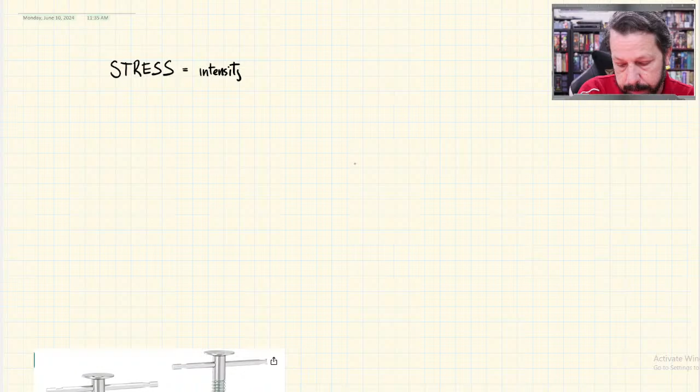Stress in general is the intensity of internal forces. We have all these external forces, like the ones we did in the first lecture and second lecture, acting on this object. We didn't really say what it did to it, but they were forces, and we were balancing forces, finding resultants, or finding components. All of those forces act on these objects, and inside the objects is what we're talking about now. So all these external forces do something - they try to stretch out a beam, or compress a column or something like that - and it's the internal forces that we're interested in.

So the intensity, how intense are those internal forces, is what we call stress. That's our general definition of stress. Our general equation for stress is that internal force divided by some cross-sectional area. That's the general definition. We're going to make some specific definitions for different types of stresses in a minute, but that's the general thing. A lot of times we'll just simplify this as F being the internal force, sometimes it'll be P over A - force over area. That's what stress is: there's some kind of force distributed over some kind of area, and when we find that ratio, that is the stress.

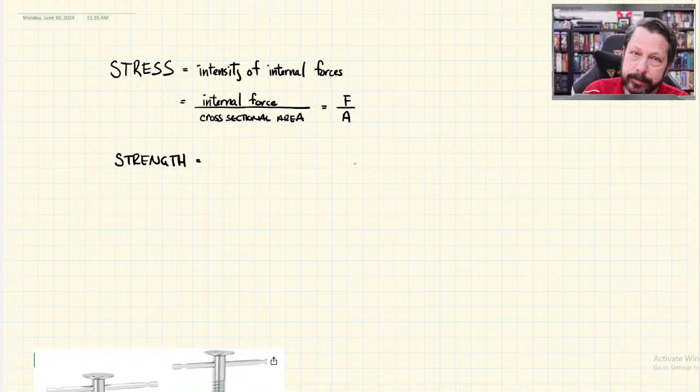And then we've got another term that I'm going to say is strength. This is how much stress an object, a material, can take. Different objects are made of different materials, and it's the material itself that determines how strong it is. So strength is how much stress a given material can endure - endure may not be the best word, but it's good enough. So this strength is a material property.

And it's a thing that we can find, so we can do some experiments. This is a lecture lab, so obviously when we're online, the lab part has to change a little bit. We're going to do some simulations later in the quarter to count as labs, and they'll simulate how you would go and actually do some of this testing and figure out a material property.

Now, normally you don't have to go test every material you're going to use - there are charts. In our case, let's see, we've got some charts. Where did I put them? I think I put them in here. Yeah, so if we go to the General tab in Canvas, there are these reference materials and material properties - there's a material properties PDF. We can look at that and get an idea of some material properties.

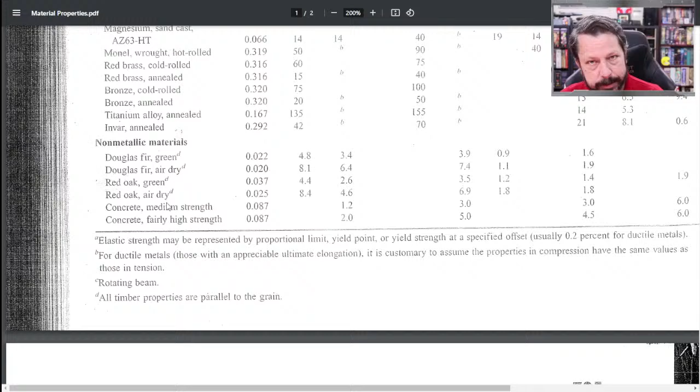So let's just look at one of them here, zoom in on it a little bit. So here's some materials - we've got ferrous metals, non-ferrous alloys, non-metallic materials. Those are a little bit different, but we do have some properties there. And then we've got a table with all sorts of numbers and letters in it, and these columns up here are different things - elastic strength, ultimate strength, specific weight, and all that sort of thing. This is the type of table where we can go find these material properties. You even see some that are labeled strength - now there's two of them, so we'll have to talk about why there's two.

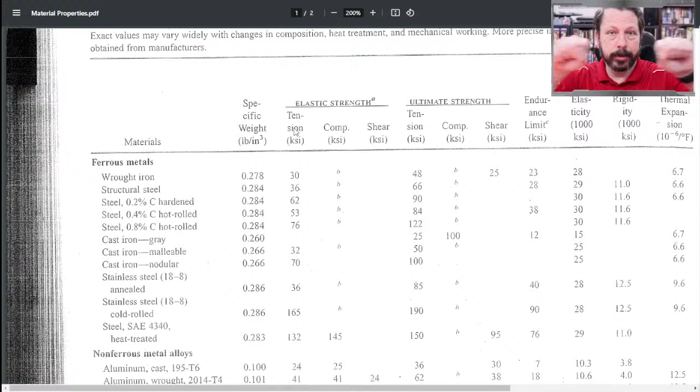But there's a strength and there's a number, 30 KSI tension. We mentioned that when we were pulling on something, we're putting it in tension. And maybe we've got this generic structural steel here, 36 KSI is its strength. So now at least we have a number that we can try to figure out what that means.

One of the things we need to do is be able to find a material strength, calculate a stress in that material, and then see if it's going to be okay or not. Materials can fail in different ways. They could just straight up break, or they could just kind of flex a little bit, stretch a little bit. So we have all these different properties.

I did just see a question in the chat about the quiz. What can we do to prepare for the quizzes? If you notice, we'll take it a little aside and talk about that.

Let's see, where would that be? If we go here, notice that there are some quizzes. Let's see, where's one coming up? There's one, quiz one. There are 5 of these. So these quizzes, doing the homework is preparing for them. These are really small quizzes. You do them on your own. They're not like exams where we sit and proctor them or anything. It's just a little test basically of where you're at, and they're meant to be on the simpler side.

So you do quiz 1, or any of the quizzes, and you have about an hour. It shouldn't take that long, but the whole point of those quizzes is that if you're struggling with that content, then you're probably not quite ready for the full-blown exam content. So I would not actually prepare at all for them. I would do the homework, watch the videos, consider that you're preparing, and then take the quiz and see where you're at. They're 1 or 2 points each, so they're not very heavy on your grade. But do them.

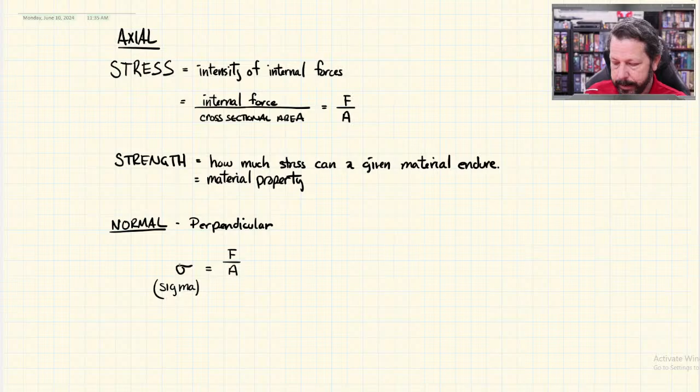So let's take a really straightforward example to start with, and let's just put a rectangular piece of metal, like a bar, under a tensile load and calculate the stress on that thing. This is about as simple as you can do. I'm going to try to draw these in 3D so you're not just looking at rectangles, but have some sense of their actual objects. But here's what I'm going to draw.

So there's our little rectangular bar. I'll try to keep things color coded so that the black lines are the object, red lines are usually forces, and green lines are coordinate systems and dimensions and stuff like that.

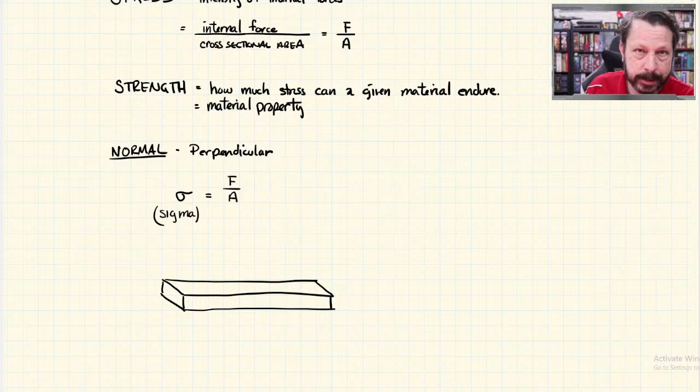Let's make that a little bigger, thicker. There we go. There and there. Those are our forces.

So this is an axial force. This thing has a longitudinal axis, and it kind of lines up right with that line, doesn't it? We have to dip down a little bit, but there's a longitudinal axis here, and this force is on that axis, kind of stretching out this bar that we've made.

So this is a tensile force, because it puts the object in tension, meaning it's stretching it out. You can also tell tensile forces because they point away from the object. If they point towards the object, they're compressive; away from it, they're tensile.

Let's give it a value. Let's use a relatively large force, 500 pounds. Now I'm going to have to put 500 pounds on both ends here.

If you go back to some of the stuff from lecture 1 or 2, remember the idea that forces had to balance, they had to be in equilibrium, static equilibrium. If I don't put this 500 pounds on the right-hand side, this is not in equilibrium. I've got 500 pounds going to the left on this little bar trying to pull it to the left, and let's say it's 0 pounds trying to pull it to the right. It's going to move to the left, and now we're not in statics anymore.

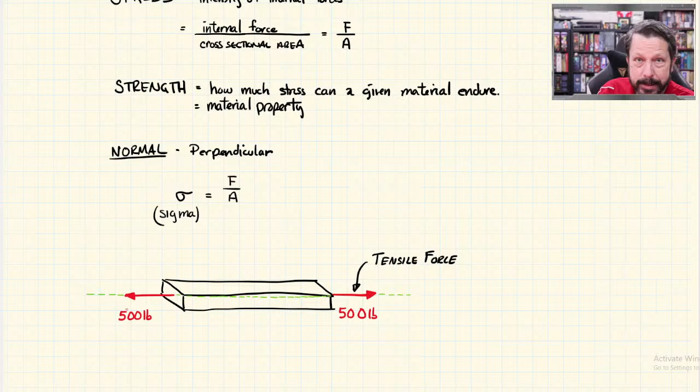Now, one thing that confuses people here is that they think, oh, I've got 500 pulling one way, 500 pulling the other way, the inside of this must be under 1,000 pounds. Because remember, we want internal forces for our stress equations.

This is going to be overly simple to do it in this case, but it does help you later on. If you can do it when it's simple, then you can gradually build up to more complex stuff. Let me see if I can make that a little bit bigger.

There we go. I'm going to cut through the middle of this bar because I want to see the inside, right? I want to see the internal force, so I want to see what's inside it. So I'm going to cut it open.

I'm going to pick one side or the other—it doesn't matter. Actually, let's just do both of them. I'm going to draw the left-hand side, and I'm going to draw the right-hand side, but cut open. So here's the left-hand side, something like this, and then the right-hand side, it's kind of got a matching jaggedy area.

Now I am drawing these kind of jaggedy, but we are making some assumptions that everything breaks perfectly smoothly, and all that. That's not real, that's not the real world, but this is our first introduction to this stuff, so we're not going to try and figure out exactly how things look when they break, how jagged or what angle they break at. We're just going to assume they broke perfectly straight, even though I draw it kind of jagged.

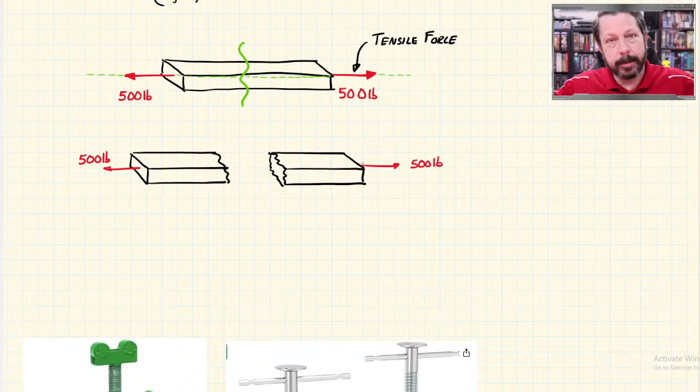Now, once they're broken, they fly apart, but right up until the point that they're broken is what I'm interested in. This 500 pounds might break it, it might not, I don't know. But when we look at this, I need to move them further apart. Let's move this guy over there.

So inside the left-hand piece, there was some kind of reaction force inside there, and up until the point of it coming apart, that reaction was 500 pounds, so that piece was in equilibrium. And the same thing over here.

So the internal force, no matter which side I look at, the left-hand side or the right-hand side, the internal force is only 500 pounds. It's not 1,000 pounds. That's a part that confuses people. It's really simple to get once you get it, but your intuition tells you it's 1,000 pounds because you're pulling two different directions with 500 pounds.

But you're not really doing that. One of these is the force you're applying, and the other one is the reaction to that. So it doesn't matter which one—we'll just say that's the applied force, and this is the reaction to that applied force. So it's really the same force. It's just that there's something somewhere holding this bar steady.

There's a bolt or a weld or glue, I don't know, but there's something on the other end that's holding this bar in place, and then I'm pulling on it with 500 pounds. It's not that I'm pulling in both directions with 500 pounds, although that's what it would look like if I drew our diagram here.

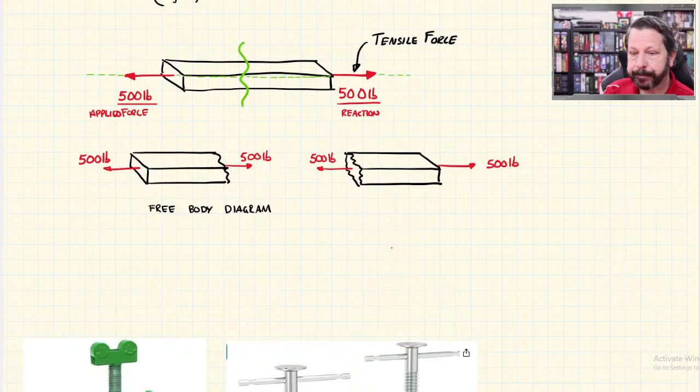So that is actually an important word there. What I'm doing here is I'm drawing free body diagrams. So free body, meaning that the body of interest is floating out in space, free from everything else, and that I have applied all of the forces that are acting on this body.

Now, here I've got two little bodies that are just a piece of the whole bar. But that's okay. You can have free body diagrams that are a single item, like this pin, or you could have free body diagrams that are just a piece of this pin. You take it apart and it's just the piece of it. Or you could have free body diagrams of a really complex assembly.

So there are a lot of different ways to do free body diagrams, but they are going to be the most important part for statics and strength of materials. So just like a circuit diagram for circuits or a control volume for thermo, every kind of discipline of engineering has its own diagram or picture with its own rules for creating that thing that helps you solve those problems. So for statics and strength of materials, it's the free body diagram.

So you've got to get in practice drawing free body diagrams. And the easiest, even though this is kind of silly to draw because it's just this little rectangle, it's good practice to start learning how to correctly assemble your free body diagrams, so that you can actually solve the problem correctly.

So I would look at this, and I would not necessarily need to draw this as a free body diagram because it's so simple, but it is good practice to start with the simple stuff. If you can't do the simple ones, you need practice on them before you can do the more complicated ones. So I'm trying to do this stress.

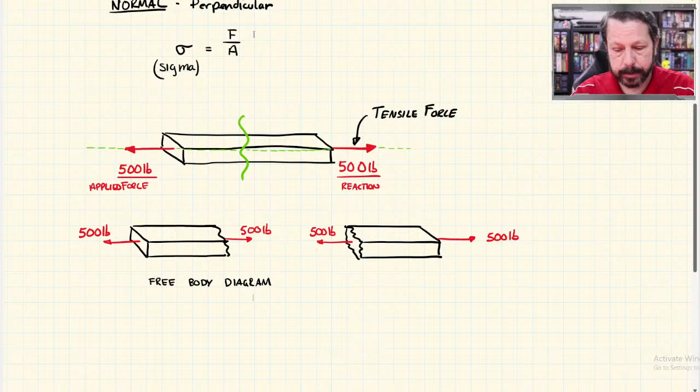So I want to do a normal stress. The perpendicular here is talking about the fact that the force is perpendicular, so there's my little perpendicular symbol, to the area. So the force here is perpendicular to the area here.

So if I look at my diagrams here, the internal force, let's just do the right hand side. So there's the internal force. The area that it's perpendicular to is this little area, that's the area that it's acting on, and it's perpendicular to that area. And since the force and the area I'm looking at are perpendicular, this tells me it's a normal force. So then I can use normal stresses and normal strengths and that sort of thing.

In order to calculate this, I need some dimensions. I don't have a great place to put them, but let's put them here. Let's just say that distance was, since I did pounds, let's do some kind of inches here. Let's make that a quarter of an inch. And then let's do this distance, which is really going to get convoluted in there. Let's say that one is a half inch.

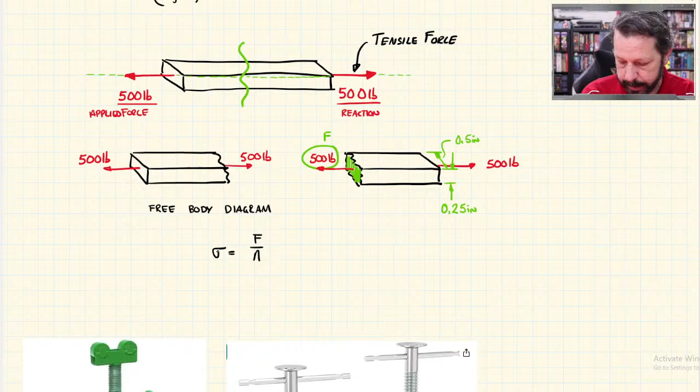Okay, and even though I drew the bar a little bit wavy, we'll assume that it's perfectly straight, and everything's the same dimensions. So if I want to do this calculation for sigma equals F over A, the internal force is 500 pounds.

And I'm looking at that internal force. And the cross-sectional area is whatever the area of that little green hatched piece is, which is a rectangle, 0.5 inches times 0.25 inches. So I had a calculator somewhere.

Here it is. No, that's not it. I don't know where I put it. I may not have brought it in here. Okay, we'll have to get the old phone calculator, I guess. Let's see, here we go.

So 500 pounds divided by 0.5 times 0.25.

4,000. And the units on that are pounds in the numerator and inches squared in the denominator, so pounds per inch squared. A lot of times we won't say pounds per inch squared, we will say 4,000 psi. You've probably heard psi in terms of air pressure in a basketball or something like that, but it's also the same units for stress.

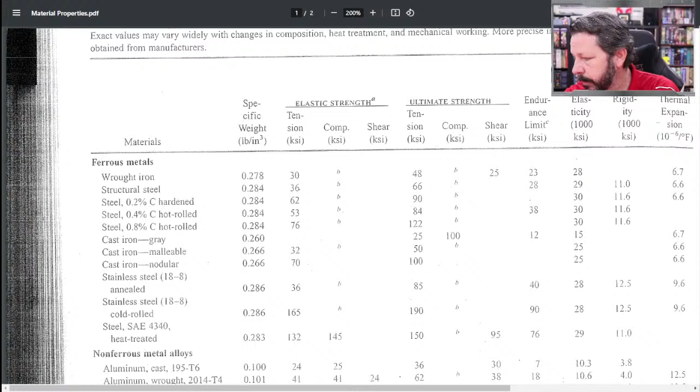All right, so that was pretty simple. So we ended up with 4,000 PSI. What we could do then is go look at our web page, material properties, maybe our structural steel. Let's look at ultimate, that's probably easier to understand right now. Ultimate strength, the point at which this thing would break, is 66, and the units there are KSI. So it would take 66,000 pounds per square inch to break a piece of structural steel. If this little bar is structural steel, even at this pretty small dimension, 1/2 an inch by 1/4 inch, we're nowhere near breaking it.

In fact, let's move these guys down again because they're getting in the way. We could say that we have a factor of safety against ultimate failure, which would be like fracture. So FS, that's going to be factor of safety, is going to equal your strength divided by your stress. So how much can you take divided by how much do you have?

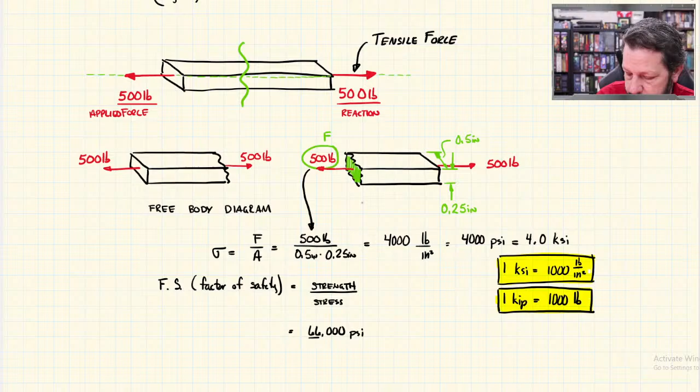So our strength, if we were doing the structural steel, ultimate strength was 66,000 psi, and we only have 4,000 psi. So what's that number? 66,000 divided by 4,000 is 16.5. So what we would say in this situation is that we have a factor of safety against fracture, because this number was the ultimate strength. Some people would call that the fracture strength, your book calls it ultimate strength though. So we have a factor of safety of 16.5 against fracture.

And that's a really high factor of safety. Normally the factors of safety we're trying to operate with might be like 2 or 2.5 or something like that, or maybe 1.5 in some cases. So 16.5 is a very high factor of safety.

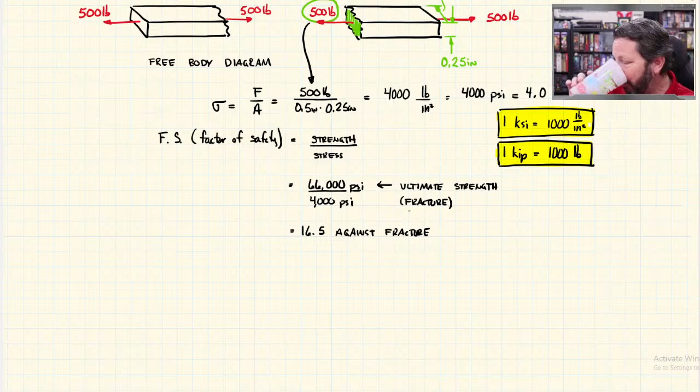But this is our example, super simple example for normal stress. Some people would just call it axial stress, although I'm using axial stress as a bigger category, and normal stress is a particular type of axial stress.

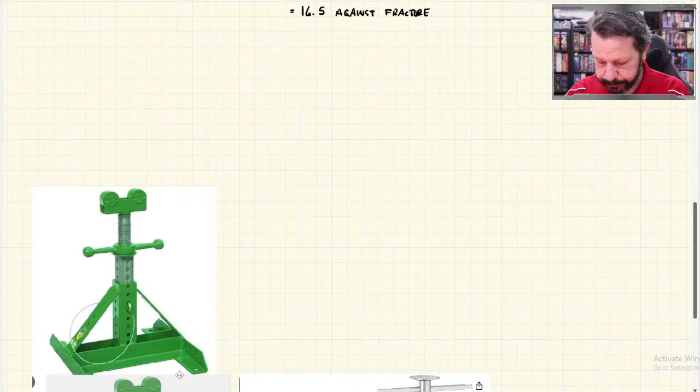Let's move on to our second type of stress under the axial stress category. Let's move these down some more because we need some new space. I'm going to call this one shear stress. So it's still an axial stress, but it's not perpendicular, it's not normal stress. The force and the area the force is acting on are not perpendicular to one another. And it's shear, S-H-E-A-R, not E-E-R.

So there's actually an example of it in this picture. Maybe I should get it back, make it a little bigger. In this picture, you've got this little safety pin right here. It actually might be a U-shaped pin, and now that I look at it, I'm not really sure. But this is a jack stand of some sort. You lift up the car, put this thing in place, and it's got some adjustment in it. You can turn this to have a fine adjustment, but you also have these holes where you can raise it up, looks like an inch increment at a time.

In order to keep it from just falling down, they've got this pin that goes through this green part, through the gray part, and out the back side, and it is in shear.

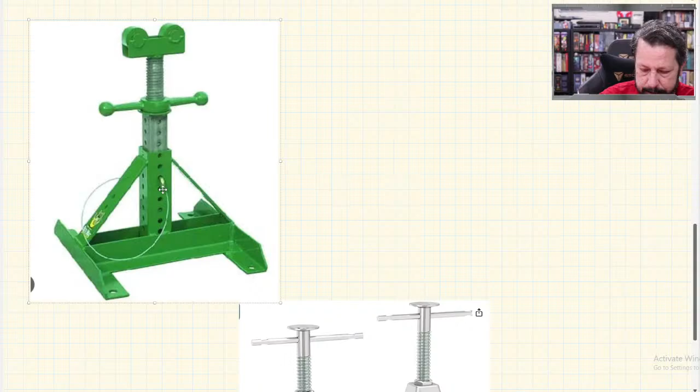So let's assume it looks like this is a U shape, like there might be two pins that go through here, through these holes. But let's draw kind of what that might look like, and then we'll use that to talk about shear stress.

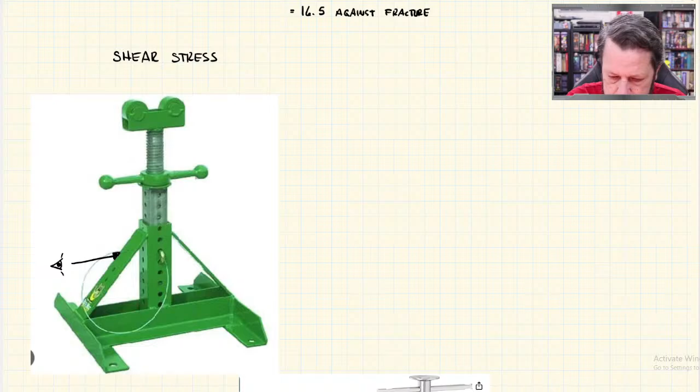So I'm not going to draw it in this view. I'm going to draw it looking from this direction, as if my eye is over here, kind of looking at it from that side. So that would look something like this.

There's the outside of the green part, and the green is pretty thick metal, so we'll draw the thickness of it kind of like this. And I even have a green, so we'll make that kind of green in there. I'm kind of just drawing that little section right there.

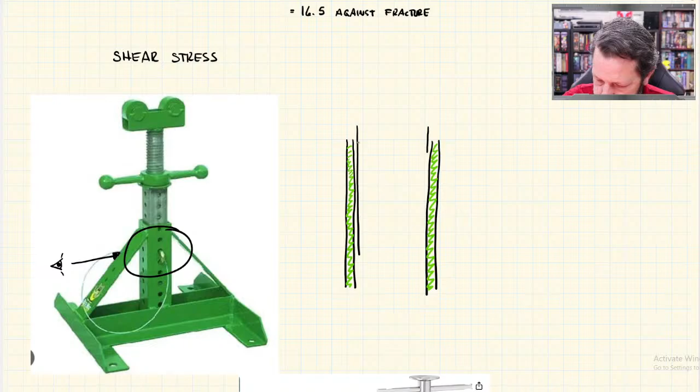Now inside the green square tube is a gray square tube. So we're going to draw that one kind of like this. We don't really know how far down it goes, so I'm going to end it right there, so that'll be its bottom. These are just kind of, I don't know how far they go.

It, I think, is also a tube, so we will give it a little wall thickness here. Maybe it's thinner than the green, I don't know, might be the exact same material. And I don't really have a gray, do I? Let's see if I can. Yeah, there's a gray. All right, so there's the gray tube.

And then this pin, this U-shaped pin, goes through all of this stuff. So the pin goes through here, all of this, and then it's a U shape, so it does something like this, and it goes through all of this.

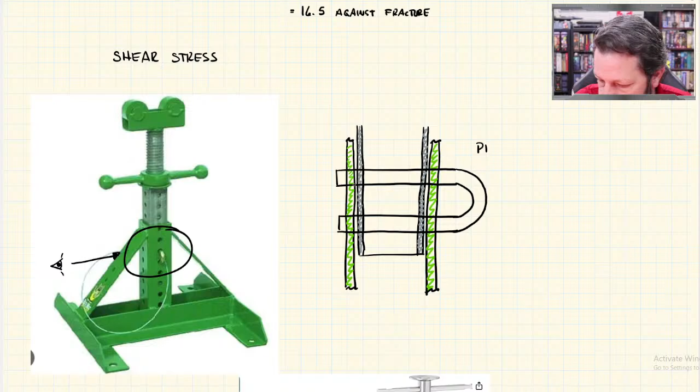So that pin is in what we would call shear. So this pin is in shear. In fact, you might even call this a shear pin sometimes.

And what that means is that obviously, if I've got a car sitting on this thing, there's a pretty big force up here, right? So there's a force that's being applied, ends up being applied to this gray tube. And then there's the reaction force over here because the green thing is attached to a bunch of stuff that's sitting on the ground. So I did put 4 arrows here, kind of split it apart.

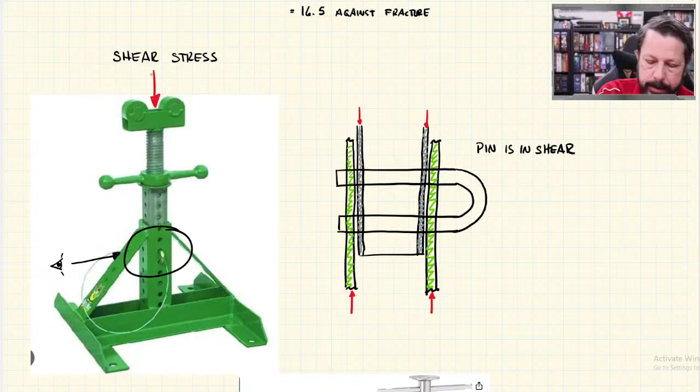But let's just say that our car, that this corner of the car that it's lifting up or holding is 800 pounds. That's kind of realistic for a smallish car, if one quarter of it is on this thing. So let's just put 800 pounds total, which would put 400 pounds here.

And I'm going to assume that it gets evenly distributed. So this is a sophomore 200 level class, and so we're going to generally assume things are evenly balanced and symmetric and all that kind of stuff, at least for now. Now someday in the future, another class, another course, you might have reason to think that this 800 pounds does not get evenly spread across the two sides of the gray tube. I think it would, even in most more advanced ways of looking at this.

Those 4, or that 800 total, those two 400 pounds need to be reacted, and I'm just going to put all of the reaction here. Right? So now I've got a thing that's in equilibrium, but the gray and the green aren't actually connected together.

So all of this force ends up, I'm going to use a red arrow, it ends up on this little surface, that little surface, that little surface, and that little surface. So if you look at those surfaces, they are not perpendicular to the forces that are causing stress there. In fact, they're parallel to them. And so that's what we mean when we say they're in shear.

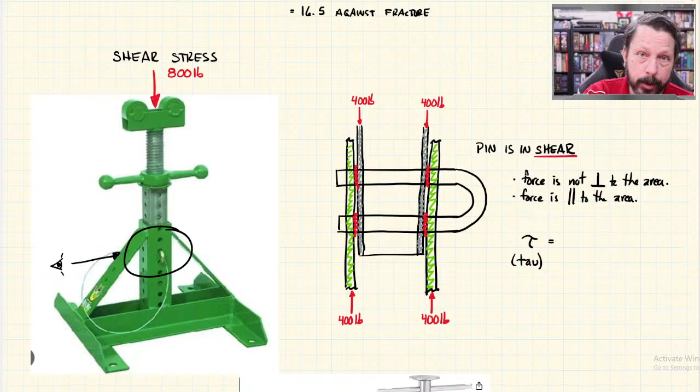Parallel to the area. So to distinguish when we're talking about shear versus normal stress, we use a different symbol. We're going to use tau, that's my Greek letter tau, equals internal shear force, V, over the area that shear force is acting on. So same idea, force over area, but two big differences: the force is parallel to the area, not perpendicular to it.

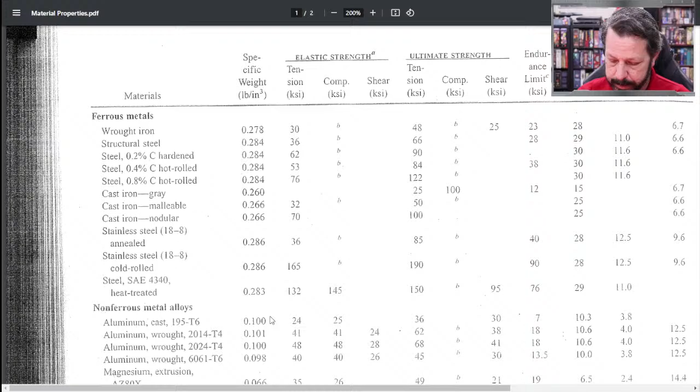Let's see, I thought sometimes there's a note down at the bottom of these charts. This one doesn't really have one though, about what to do. But you have to choose, because there are multiple models you could use for calculating the shear strength. We're using the most conservative, simplest one.

All right, so back over here. Where's there? There we are. If we wanted to calculate the shear stress in these pins - well, this pin would actually need to fail 4 different times, right? All 4 of these little red squiggles that I drew would have to break in order for the jack to fail. So this would actually be an example of quad shear.

So you can have single shear, double shear, here I've got quad, you can have any number. But in this particular case, we would need 4 different cross sections of the same U-shaped pin to fail for the jack stand to come crashing down - and this is a jack stand, we're probably working under this car, so we want it to not be likely that this thing's going to fail. So we've made it have to fail 4 different times, at least for the pin to fail.

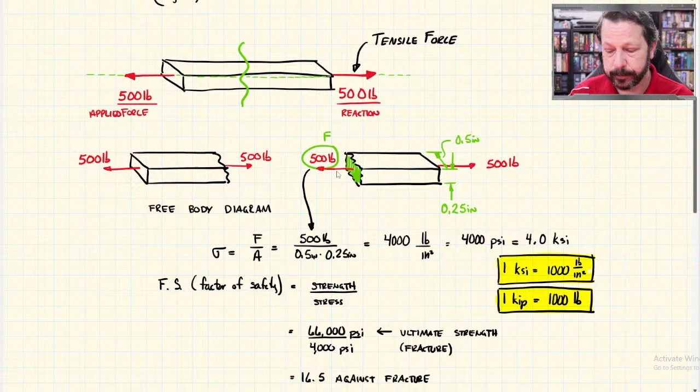There are other ways the jack stand could fail. There are even some ways like this where instead of a tensile force, it's a compressive force. Other parts of this do have normal forces, and it's possible they would fail. But this particular one is a shear stress.

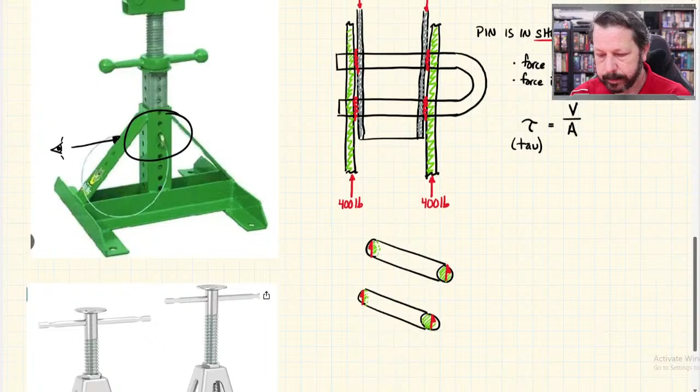Now figuring out, well, how much is this really going to be? The total external load, looking over here at the jack stand, the whole jack stand on the left, the total load is 800 pounds. That total load gets spread out over these 4, so each one of these is 200 pounds.

Now again, does it get spread completely, perfectly, evenly? It actually gets close, assuming that these are all the same size, because as you apply loads to objects, they deform a little bit, and they kind of all even out. So assuming that it's more or less even to begin with, then it's going to be close to each one of these 4 little green circles having about 200 pounds on it. There might be one that's a little bit smaller with a smaller area and higher stress there, but for this course, we're assuming things are perfect.

So that's kind of how I would draw this. I would also need to know what size are these. So I don't know, looking at the picture, maybe that's 3/8, maybe that diameter.

I'm going to use inches since I used pounds on the other thing. We will use both metric and US units in this course. A lot of times I end up defaulting to US units, but metric units are just as valid and useful, and so we will use both.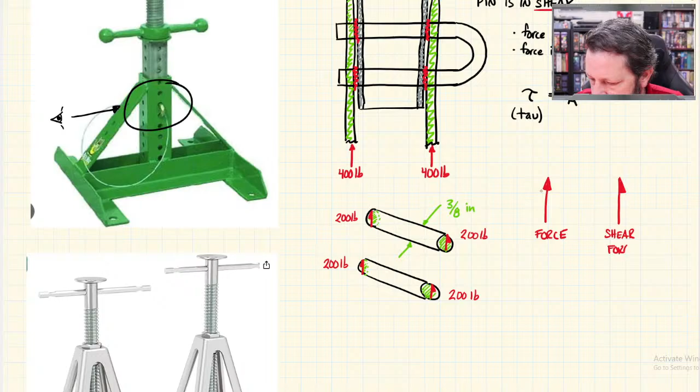Let's see, one other thing about these. Notice this is just a technical thing, but for forces, the regular forces we've been using, we've used an arrow kind of like that. But for shear force, we show it differently, and the arrow is only one-sided. So that's another way that we're reinforcing the fact that these particular things are shear forces generating shear stresses, and so you even draw the arrows with only half their arrowhead to show a shear force.

Also, super in the weeds here, but I'll go ahead and tell you, this arrowhead size is 3, and I guess this one doesn't have the other side on it, but to 1. So that's really not very important, but if you're drawing these by hand and you want it to look consistent and typical, then the arrowhead is a 3-to-1 ratio. I'm not going to grade you if your arrowheads aren't 3-to-1 ratio.

So to calculate our shear stress, tau equals V over A. It doesn't matter how we approach this. We can either say that, well, our total force is 800 pounds, we have 4 200-pound shear forces, and our area is 4 areas that are pi times diameter 3/8 of an inch, pi d squared over 4.

Let's see, I've got to get my parentheses sorted out right. So you can either do that, or you can just say that, well, they're all equal, so one of them is 200 pounds over a single area that is pi d squared over 4.

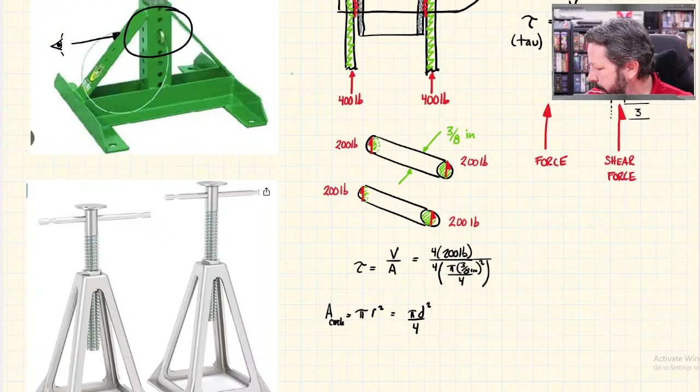Also, another aside, you probably often do area of a circle as pi r squared, which is completely fine. I did pi d squared over 4, which is equivalent. Seems more complicated, except that if you go to actually talk about things that are round, like a bolt or a pin, or if you go to measure something that's round, you get your calipers out and you measure it, you're measuring and talking about the diameter, not the radius. So it usually makes more sense and it's more familiar if you use pi d squared over 4, because that's probably the measurement you have. It's totally fine to say the radius is just half of d and deal with it that way, but you're probably going to be given diameters, and that's what we were given here, 3/8 inch diameter.

Now my phone calculator is probably not going to like this very well, but let's see if we can calculate this. All right, so our numerator is 800 pounds. Our denominator is 3/8 of an inch squared, which I don't even know where squared is on here, so let's just multiply by 3/8 again.

Whoops, 3 divided by 8. So pi d squared times pi, which we're just going to use 3.14159 because I don't know where pi is on this. Divided by 4 times 4, so we don't need that, that's going to end up being the same thing. And I think, let's see, did I get everything squared times pi? All right, so I think our denominator is 0.4418 inches squared. So we do end up with PSI.

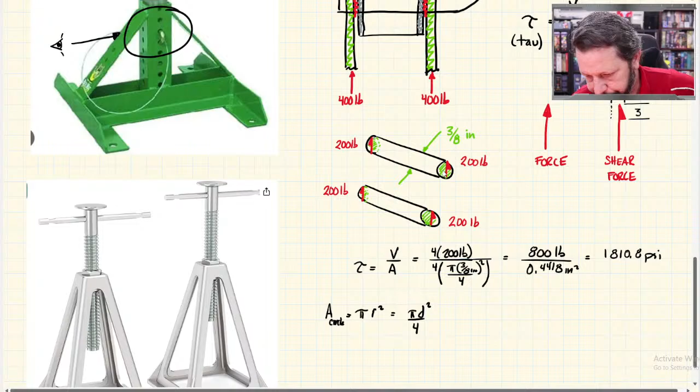The question was, why did I draw all these arrows pointing up? It's because I took a shortcut and didn't draw everything. So let's take all of this, copy it, and put it down here.

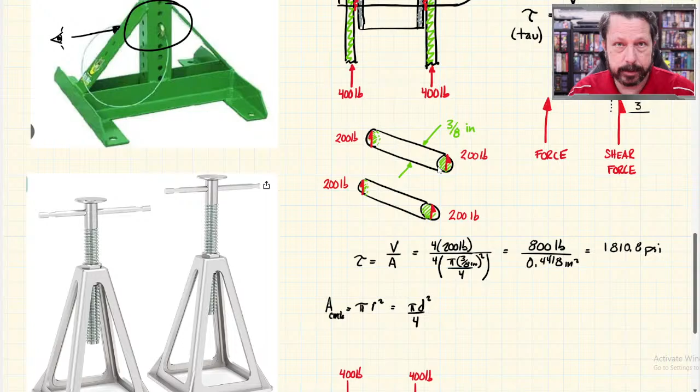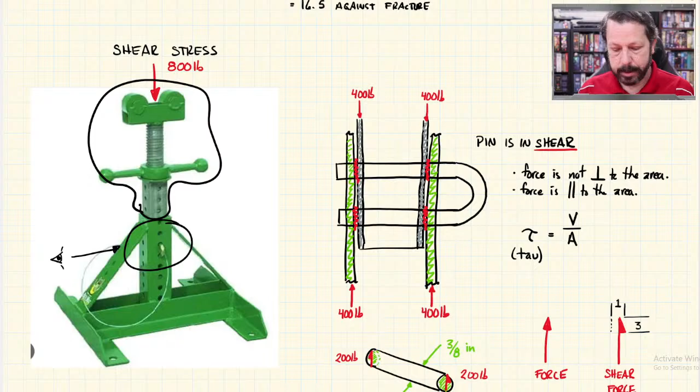Let's say one way this thing could break is like this - the way we're interested in is that the U-shaped pin shears and the thing falls down on us. What that would mean is all of this is gone - the gray inner section shears off the pins inside the jack stand, and this thing comes crashing down on us, down inside that green tube.

So what that would do is, this is the failure mode. The gray tube has sheared all of these green circles, and the pin - there's pieces of the pin over here laying on the floor somewhere, and other pieces over here laying on the floor too, or maybe stuck in the green tube, but they're not holding up the jack stand anymore. So this free body diagram would represent that situation.

So we're asking what-if questions: what if the U-shaped pin failed on us in shear? This is what it would look like. That free body diagram would have the 800 pounds pushing down, and these shear forces are all the reactions to that. If I don't have these 200-pound reactions on each of those sections, then it's failed - it's broken, and the jack stand has come crashing down on us.

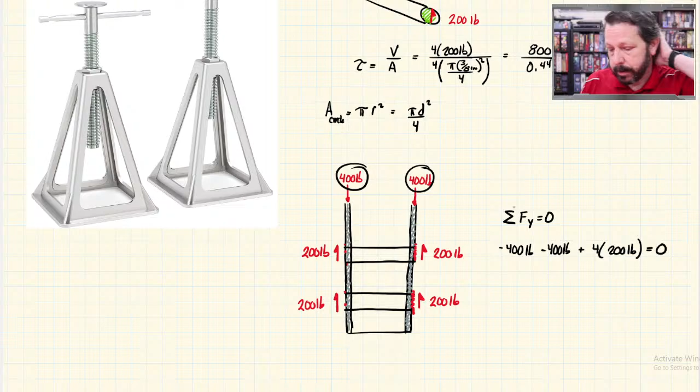Remember from equilibrium, summation of forces in the y direction equals 0, assuming y is positive going up. I've got a total of minus 800, because those two point down, plus all of these four 200-pound forces. If that does not equal 0, which it doesn't right now, then I'm not in equilibrium and things are moving. That's why I pointed them up - they're reactions to the 800 pounds of the car sitting on top of the jack. That's why I drew them that way.

Now, the good thing about shear is it doesn't matter if you shear one direction or the other, because the material behaves the same. But for axial forces, look at the cast iron gray - it has one number in tension and a completely different number in compression. Some materials don't behave the same in tension and compression, plus the part itself may behave differently. Think about a rope: I pull on it and it's great, but I push on it and it doesn't resist at all. So it matters with non-shear forces whether you got the arrows the right way, but with shear forces, if the arrows are backwards, it behaves the same either way - so it's not as big a deal.

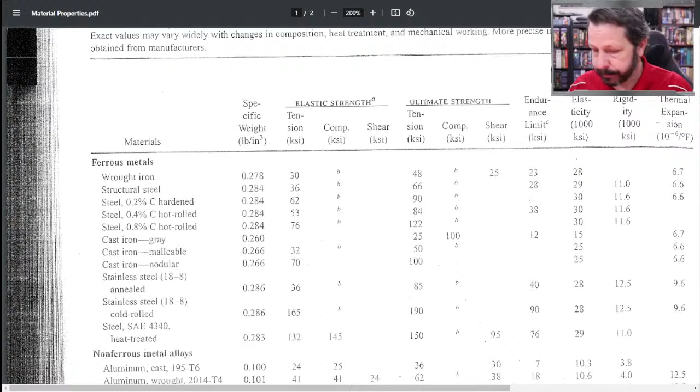All right, so that's that. Let's see our number - I never confirmed if this was right, but 1800 psi, or 1.8 ksi if we wanted to use that. Is that a big deal? These are probably steel pins, so we can use that generic structural steel number: 66 ksi of tensile strength. There's no number listed for shear, so our idea is to take half of the tensile, so 33 ksi. We're at 1.8 ksi - we're nowhere near failing this thing.

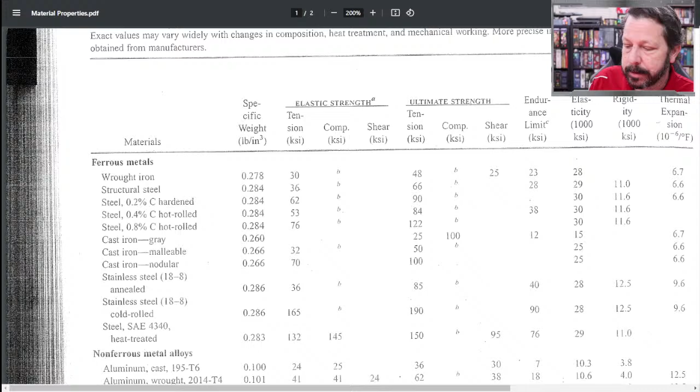So if we wanted to write that out, it would be our factor of safety, and again we're going to do this against fracture, which equals our fracture strength - which your book calls ultimate strength.

If this is structural steel, that number is 33 ksi, or 33,000 psi, divided by our stress. In this case, this is a shear fracture, so our shear stress...

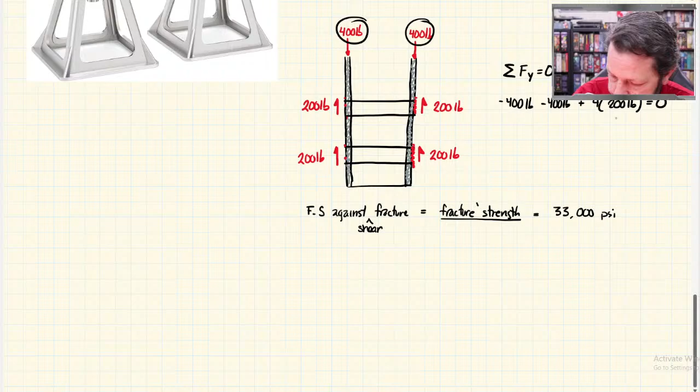That I calculated was only about 1,800 psi, assuming I did that right, which I don't know. It was approximately that, so that gives us a really large factor of safety. If the 1,800 is right, then 33,000 divided by 1,800-something, 1,810 is what it was. But if we did 1,800, it's 18.3, approximately 18.3. So even more factor of safety than the first one we did.

Now that is assuming the 1,800 psi is right. You'll have to do those calculations on your own. It's really just this little equation, which hopefully I did correctly, but on the phone, I don't know. Any other questions on the shear or normal stress?

We have one more type of stress, and actually there's another type of shear, some other words, still a shear stress. Oh wait, somebody said that they got the same number. Good, then they actually used a calculator. So hopefully that 1,810 is right, which gives us a really large factor of safety.

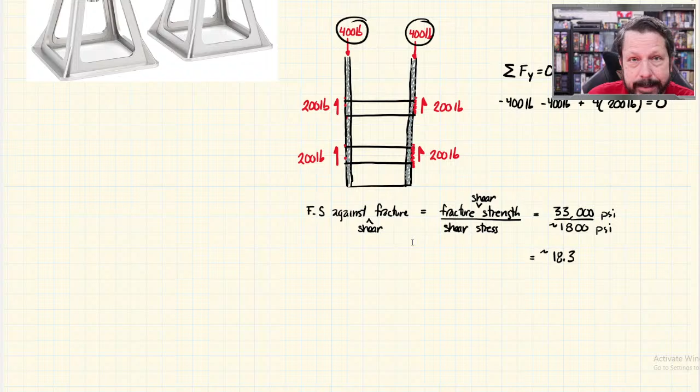Now, I want to point it out again, you do have to make sure you know shear stress from non-shear stress, because the strengths are so different. If we only had a factor of safety of like 1.2, but we actually calculated this as a regular stress and not a shear stress, then it probably would fail, because shear strength is so much less than the tensile and compressive strength.

So be careful, and you can 100% know when you draw your free body diagram if the applied load - in this picture it's easier to see, if the applied load, the 800 pounds up here at the top, or the two 400 pounds - and the reaction loads, so the internal 200 pounds, all these little 200 pounds, if they are not perpendicular to the area you're interested in at that time... here the areas are, we're just seeing the side of them, those four areas - it keeps erasing them, it thinks a squiggle I want it to erase. So if those forces are not perpendicular, then it's a shear force, and you've got to do a shear analysis. The equations all look the same, but the strengths are way different.

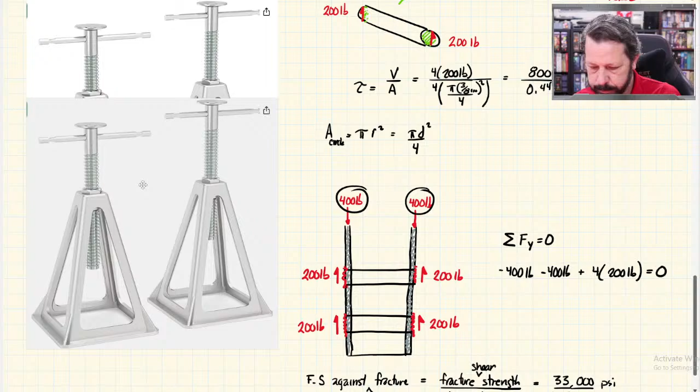All right, let's talk about the third type, and then we'll go back and do some special cases for shear. Actually, the third type we'll use this picture, so let's move it down here. Okay, so another type of jack stand.

So here we have some, you could maybe calculate a shear stress on this pin that's going through the bar here when you try to raise the jack up or down. It acts like a screw. There's some normal stress in these legs over here, and in the screw itself there's a big normal stress there that we could calculate. But this one is a special case, and it's going to be called a bearing stress.

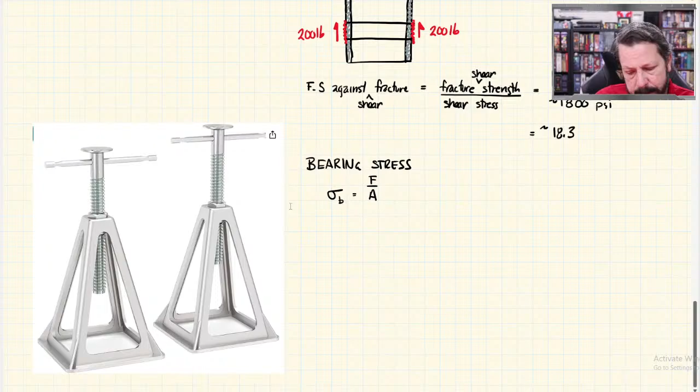And it's going to look pretty much exactly like a normal stress, but it's a special case. So we will use sigma, sigma B a lot of times, to say that it's a bearing stress, and it's going to equal force over area. But here the force and area are actually in contact. So the bearing part is that this area is bearing the load of some sort. I mean that's still true here - this shear stress or shear force is on that area, but here we're talking about they're going to be perpendicular, or we will treat them as perpendicular, and there is a force that is being distributed over some area.

So there's actually two good examples in this jack here. One of them is that the jack stands are sitting out on the ground, and there's this area, something like this, at their base that's sitting on the ground. That area would be the bearing area in this scenario, and it's acting to kind of spread out the load.

You know, if I've got our 800 pounds up here again - if I put that entire load, if I didn't have the legs here, and I only just had the screw part, and it just went in the bottom of the screw sitting on the ground, that's a really small area. It'd be unstable, and it would put that 800 pounds on a pretty small area. So I don't know how big this... oh, let's not do that.

I don't know how big this diameter is here, but let's say it's a 1-inch screw. So sigma bearing equals F over A, and I've got 800 pounds spread out over an area of pi d squared over 4, with d equal to 1 inch. So what is that? Pi times 1 squared is 1, divided by 4, so 800 divided by 0.7854, I get 1,018 psi. That's not large, except you have to think about this jack stand might be sitting on dirt or something like that.

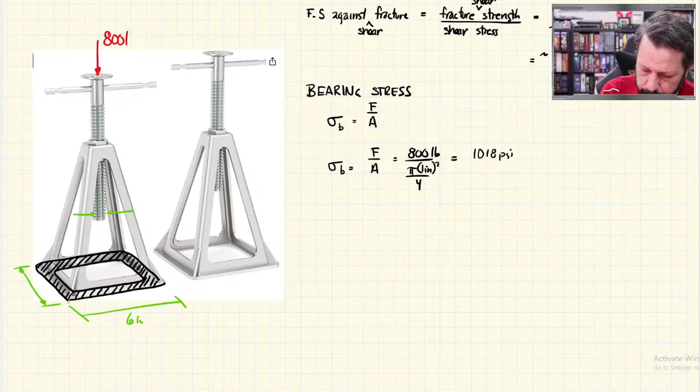But anyway, once I start spreading that out, this bearing stress will be much lower. So let's say our dimensions here, let's say that if that was 1 inch, then that's like 1, 2, 3, 4, 5, maybe this is 6 inches, and this is let's call that 4. No, let's assume it's a square, so it's just in perspective, 6 inches also. And then let's make this internal part, looks like that might be 1 inch, so let's make this 4 inches in here. 4 by 4, even though I drew it like a rectangle, if we looked at it from overhead it would be a square, a hollow square. There's a cutout in the middle.

So the area for that thing would be, sigma bearing equals force over area. Same force, 800 pounds. But now the area, if we did this whole rectangular base, is 36 inches squared minus 16, we have to cut out the hole. So 20 square inches. So we have 800 divided by 20, we have 40 psi.

So this one is if we put all of the force on a little 1 inch circle, just the screw. This one is if we did all of the force on this base here, which is much larger, so the stress goes way down. So you can manipulate your bearing stress by calculating the large area that you have spread out your force over. A lot of times you'll see things like these jack stands, where you're trying to spread out the force over a larger area so that you can reduce that bearing stress.

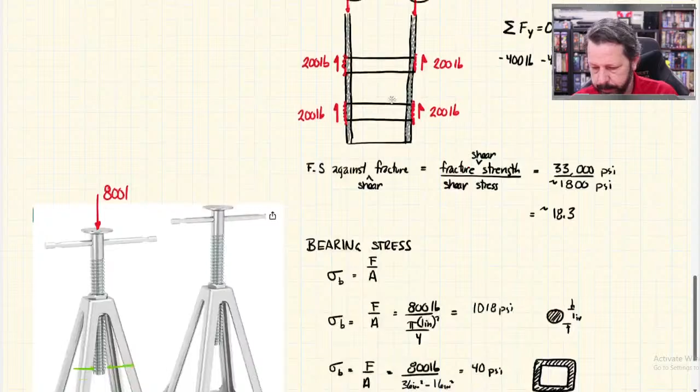But another one you might have to deal with sometimes is related to this problem. It's possible that we have this same load scenario, but the pins are really strong, so they don't shear. In that case, let's take this—I've already erased it—let's just copy it and we'll deal with it down here. Okay, so let's say the pin is strong. I don't know if I'll be able to erase this well, but we'll erase those and then put them back. And we got some gray in there, and the pins go through everything. All right, so we have strong pins now that aren't going to break on us.

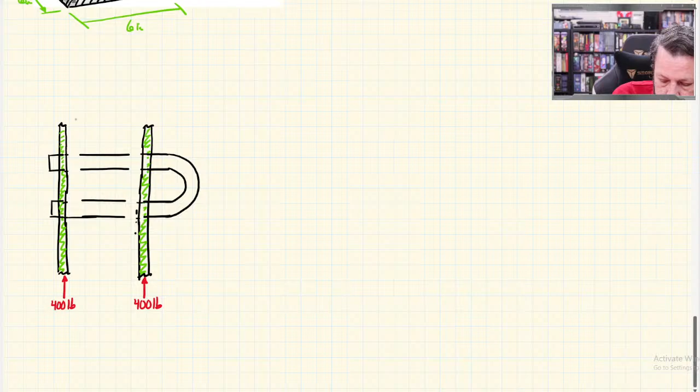It's possible that the pins are bearing on the green tube and on the gray tube, just in a different way. But let's look at the green tube, so let's get rid of the gray tube. Gray tube is gone. You may not always know which piece to look at to determine what's the worst case scenario in real life, so you might have to try a bunch of different things. We might have to see, is the bearing stress between the pin and the green tube worse, or between the green and the gray tube, or is the pin itself going to fail and shear?

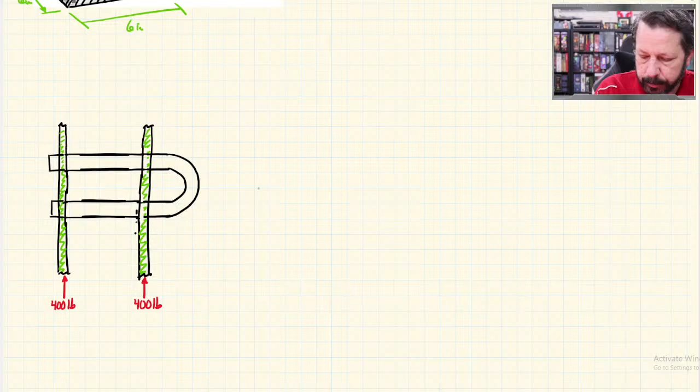You might have to do a lot of what-if scenarios in the real world to figure out your limiting factor. In the course, we'll just tell you, calculate the bearing stress between the green tube and the U-shaped pin, we'll tell you what to do if we want a particular thing. So what I'm interested in here is let's draw a side-ish view of one green tube. The green tube was, just so you remember, this rectangular tube down here that's got the circle around it. So that's what we're looking at. So, it's something like this.

We're going to draw it straight, let's not do it crooked. We're not going to look at the whole thing, we're just looking at some little section of it.

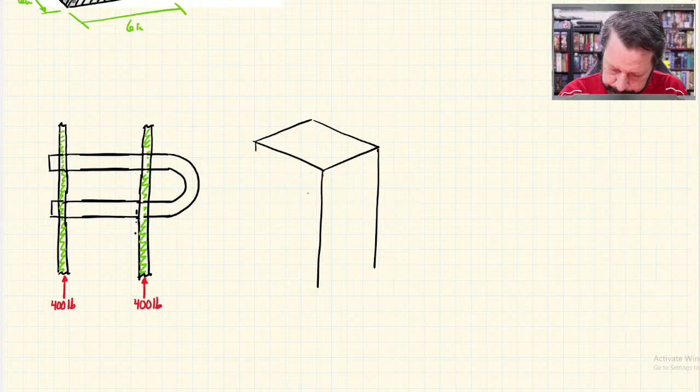So it goes on and on. It does have some wall thickness, and it's got these holes in it. So I'm going to draw a couple of the holes. Here's one, and here's one. And they're somewhat thick, right?

And there's matching holes on the back that we can't see. So that pin, the U-shaped pin, is sitting and bearing on this surface and that surface, and then the ones on the back too. So that's a bearing stress. The pin is bearing on that surface.

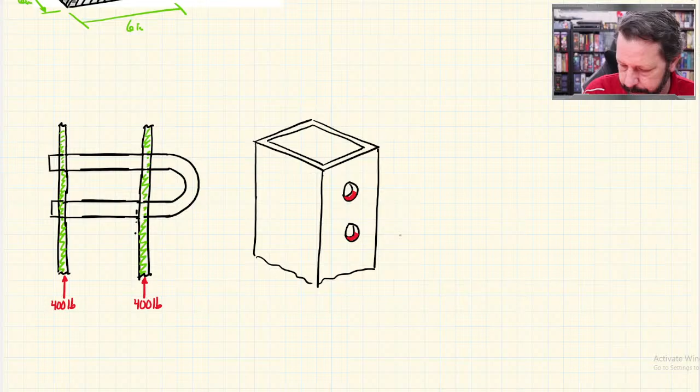The only problem is it's curved, right? Like if we look from this direction, so here's our little eyeball guy, and he's looking at it from that way, then you would see something like this.

And we don't know how far it goes, but there's a perfect circle here, another one here, and the pin is in both of those because we have this U-shaped pin, and the force is acting on this surface, and then the reaction force is on the bottom.

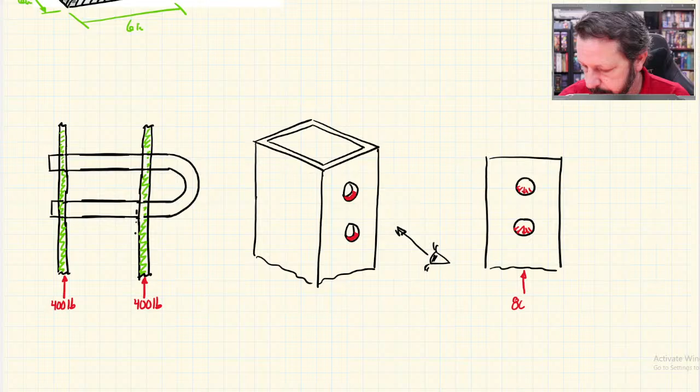A total, I had split it up as 400. If you look on the left side of the screen, there were two 400s, but the total is 800 pounds. So how do we deal with that?

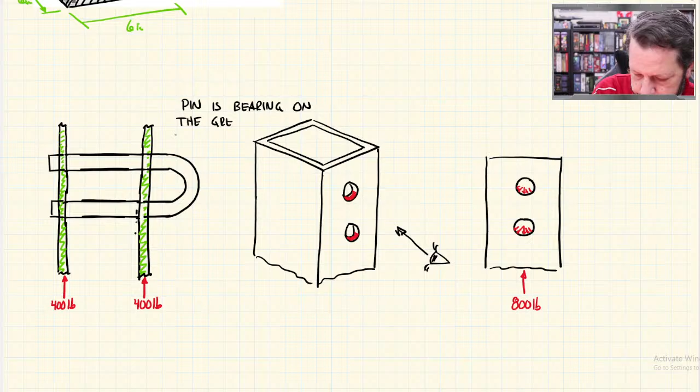This is a bearing stress. The pin is bearing on the green tube. I'm showing the bearing with these red arrows, the red shaded in area.

The problem is it's not as easy as this because I've got the force over area idea, but the area is curved now, and the force is not evenly spread on there. Let me draw it bigger.

So take both of these holes, so there's one, and then another one. So there's our two holes kind of isolated on their own. The force in them is largest in the center, and then it tapers off until there's no force on the edges, right? So that complicates how I'm going to deal with this thing.

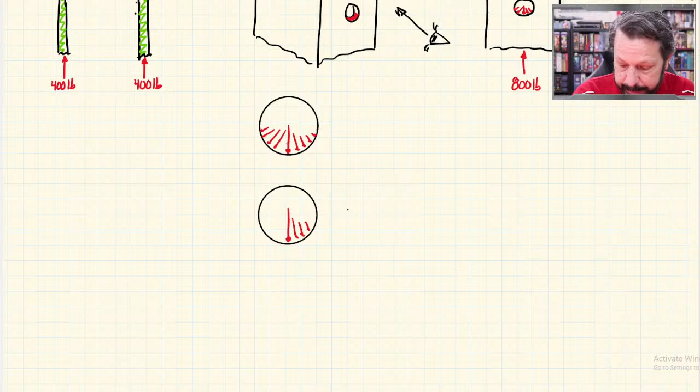So to simplify it, because I don't like the complication here, I'm going to do what's called a projected area. I'm going to project this area, the one I've shown in the middle there, onto a flat surface.

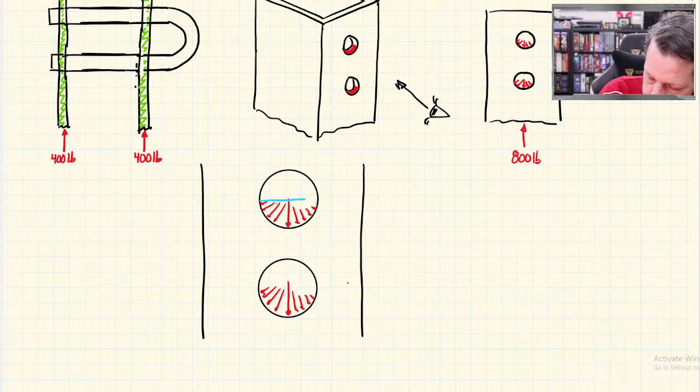So I'm going to project the area onto, let's add a blue line. All right, so I'm going to project the curved area onto that line right there. And this will sort of even out the uneven distribution of force on the curved surface area, kind of average it all out.

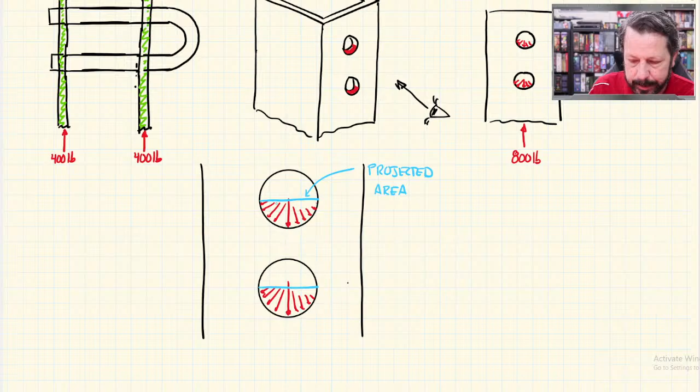So let's copy this guy and put him over here, and make it bigger. So here's the little projected area.

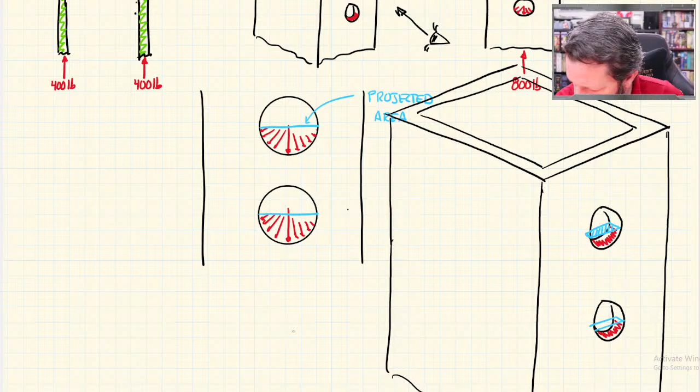So it's the thickness of the tube wall and the diameter of the hole. That dimension is the wall thickness in this case, and this dimension, let me not get those confused, this dimension is the diameter of the hole. So that's just DIA.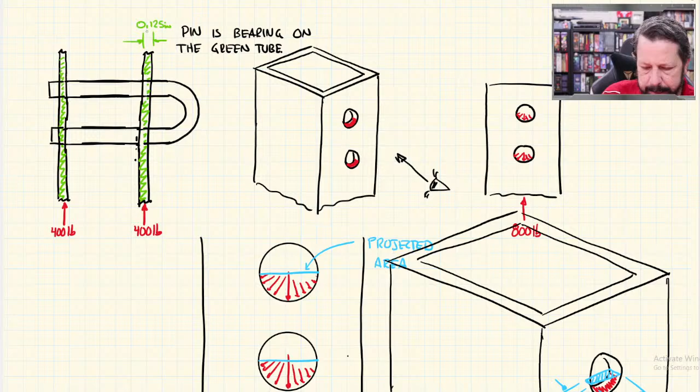So we've got lots of little pictures here. Let's go back to this one with the green wall on it, and let's give this thing a wall thickness. It's probably 1/8 of an inch, I would guess, so that's 0.125 inches. And then we gave the pin earlier a 3/8 inch diameter, I believe. We'll just keep that.

Now, the hole that the pin is in is probably a little larger than the pin, there's some tolerance in there. Again, we're assuming everything's perfect here, so we're going to use 3/8 of an inch for the hole size also. So what we would do is sigma B, the bearing stress between the pin and the green tube, is force over area.

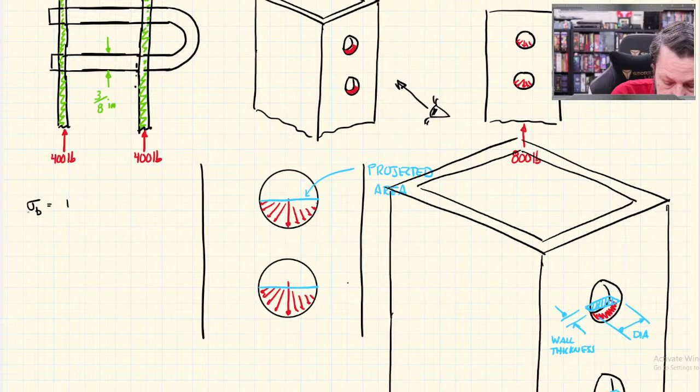I've got this idea that the force is all spread out across there, but for the total force, first of all, I have 4 of these locations. I've got 2 of them shown here, and then there's a matching 2 back here that I didn't draw, because they're on the back side of the tube.

So I've got 4 forces, and I'm assuming they are dividing up the 800 pounds equally, so each one is 200 pounds. The area those forces are acting on is the projected area. It's not the area of a circle or the inside cylinder of the hole. It's the projected area, which is the wall thickness, 1/8 of an inch.

There's 4 of these for one thing: 4 times the wall thickness times the hole diameter, so 3/8, which is 0.375 inches. Let's see if I can get that to calculate.

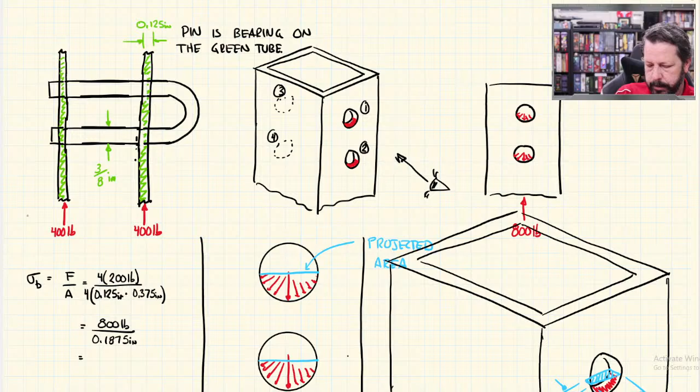So we have 800 in the numerator divided by 0.125 times 0.375, and there are 4 of those, so times 4, giving 0.1875. That gives us 800 divided by 0.1875, which equals 4,267 psi.

So we could take that number, 4,300 psi, and check it against our compressive strength. This is like the pin pushing on the walls of the green tube in these little holes, so it's a compressive strength situation.

We could calculate our factor of safety. Let's check against fracture again, although this probably won't fracture, so let's use something else. Probably what would happen, if we look at the holes right here in the middle, is it would just kind of deform the hole, something like that.

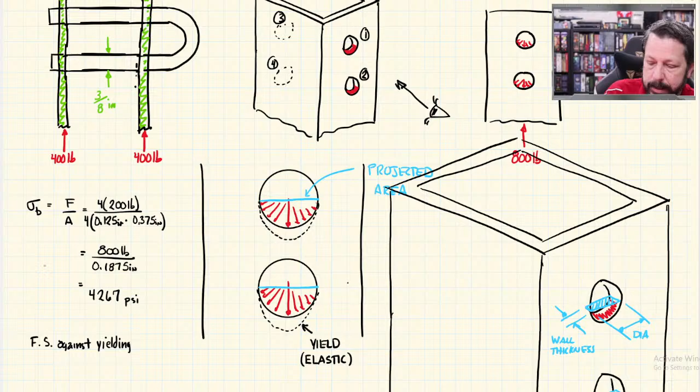So it wouldn't necessarily break it in half, it would just deform it. So we use the word yield - it would yield the material, or be elastic, sort of like an elastic band. Your book has elastic strength listed in it. So instead of checking against fracture, let's check this against yielding, because that's probably more likely to happen. Things yield before they fracture, but in this case, yielding and elongating these holes would make everything sloppy - the holes wouldn't be round anymore, and the pins wouldn't fit right.

So let's do yielding. If we go to our structural steel and go to the elastic strength column, because that's the yielding strength, we have a B under compression. This is compression, meaning the pin is sitting in that hole pushing on it, so it's compressing it. The B does have a note saying that for these materials, unless you have a better reason, the tensile strength yield is the compressive strength. So structural steel has B under compression, so we're going to use 36 KSI as its compressive yield strength.

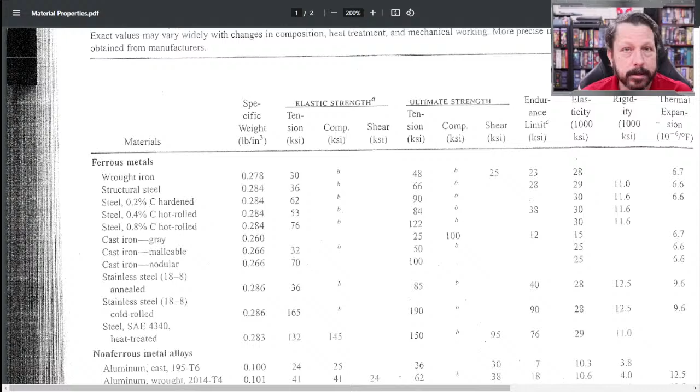So factor of safety against yielding equals our compressive yield strength, since we're in a compressive situation - bearing is compression, it's pushing against it - divided by our bearing stress. Compressive yield strength was 36,000 psi. Bearing stress was 4,267 psi. So we still have a factor of safety greater than 1, which is what we at least want.

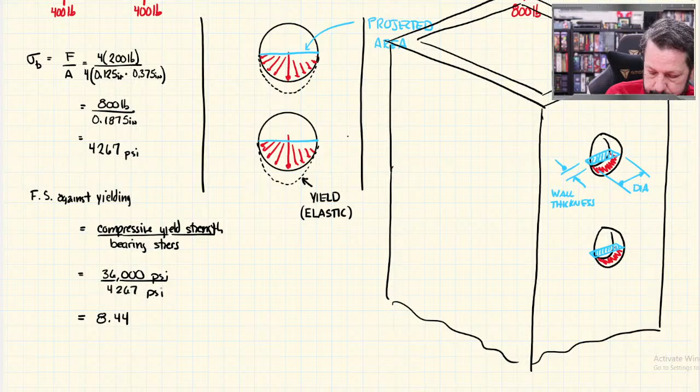But it's smaller than the others. 36,000 divided by 4,267 is 8.44. So still plenty, but the others were like 18 or whatever. So we'd still be feeling pretty good that this isn't going to happen to us. We could essentially add 8 times the load we designed it for, the 800 pounds, and still be okay. So that would be a bearing stress.

Now let's see what time we're at. Let's go back to shear. So there's bearing, let's go back to shear. They're basically the same thing, but there's 2 other words we might use in the shear category. I don't even think we need to calculate those, but I want to show them to you because they kind of relate to this.

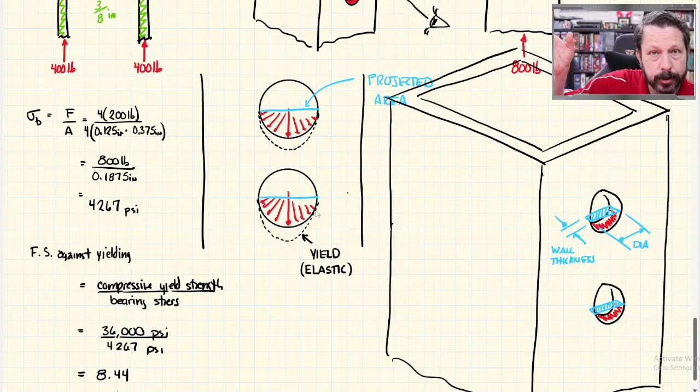So here we're just saying the holes got deformed, they're not round anymore, they're kind of this oval egg shape. But it's possible that instead of just yielding, it totally rips these holes out of here. So there is a shear stress that's called tear out, sometimes called punch out. The difference is tear out, like a hole tearing out, versus punch out, meaning you're punching out like washers or donuts, punching them out like a cookie cutter. So these are shear stresses.

They have the exact same equation as the other shear stress, tau equals V over A. They're just special words. So tear out would be something like this.

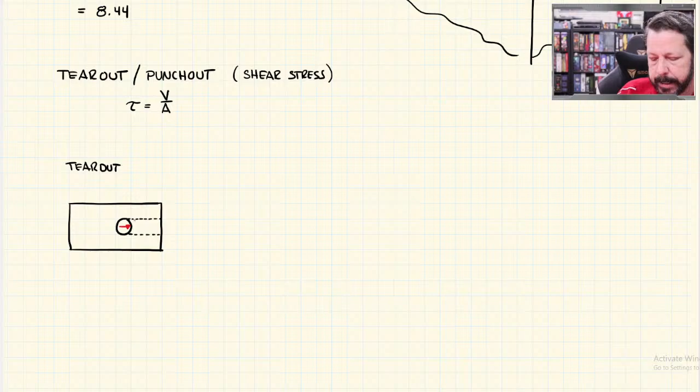Let's draw one sideways here. So you've got something like that green tube. There's a hole in it, and some kind of pin in that hole. There's a bearing stress between the pin and the hole, but instead of just deforming the hole, this entire thing actually tears out. So you end up with this piece coming out of here, it tears out.

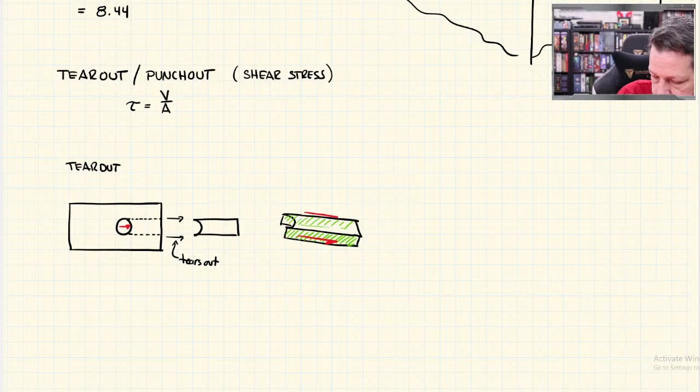If you had this little chunk, looking at it in 3D, I have this area here and the matching area on the back, which is hidden but it's back there, that have to tear out. So the shear force on this surface and on that surface is spread out over an area that is whatever that thickness is, which would be the thickness of the plate.

Usually we use T for that thickness, and this dimension from the center of the hole to the end of the plate we can call L. There would be 2 of these areas, so your equation would be tau equals V over 2 times your area, which is T times that L distance. It's pretty straightforward, a direct shear type of failure, but we call this one tear out.

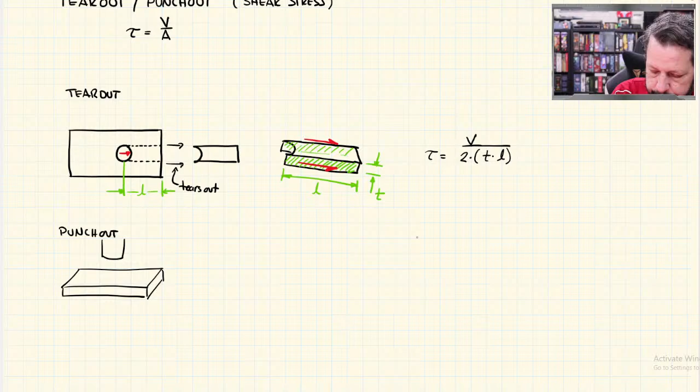And punch out is the same thing, except it's like a cookie cutter. So you've got a plate, and some kind of tool—usually you're doing punch out on purpose. There's some kind of tool that you are pushing down into that plate, with a force on it, and your whole goal is to punch a hole out of this thing.

So you've got a little piece that comes out here, and the area is the surface area of that thing you punched out. So you have to do the perimeter of it. In this case it's just a circle times the thickness. So again, you have the thickness of the plate you're punching the part from, and the perimeter is the other dimension. It's the surface area of a cylinder in this case, but it could be any shape—it doesn't have to be round. It could be a square or a completely made up shape.

So it's the perimeter of that shape times the thickness, and it is still tau equals V over A, where V is the same as before, but A is the perimeter of the shape times the thickness of the metal. Usually we're doing metal here, but it could be other materials—the thickness of the plate that you're punching this thing through.

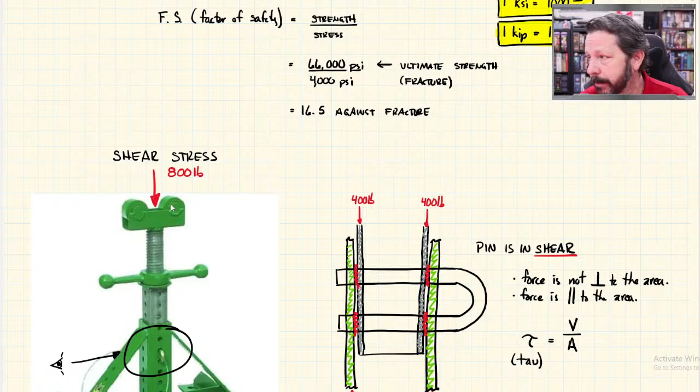Okay, so that should get you through homework 3. I just made homework 3 visible, I believe. There are other videos—if you want to watch an older video of this, I do basically the same thing with different examples. I think in last year's video I worked through a WeBWorK problem specifically, so you might have some guidance on a specific WeBWorK problem there.